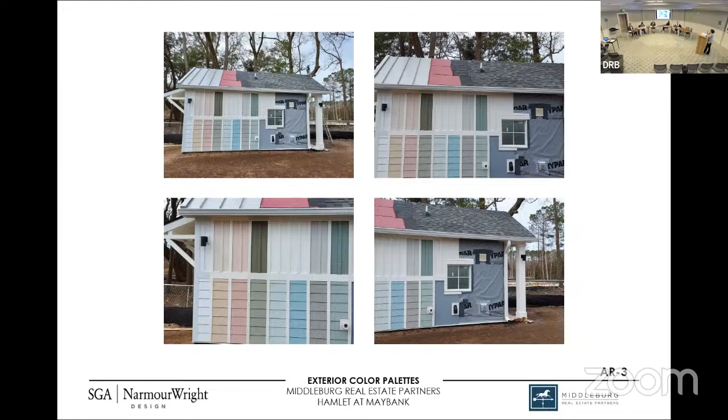Moving left to right in the image are the 9 colors for the dwelling units, inclusive of the main body color, portrayed on the lap siding, and the accent color, portrayed on the board and batten, and the trim color. Everything on the left-hand side of the panel is for you guys. We had the contractor intentionally leave exposed water vapor barrier flashing for us to use as quality control inside, so really we're asking you to look at the finished portion here, and the light fixture as well. If you flip, David, we'll see the ends of the panel—those are the amenity colors.

Flip again—this includes those color palettes applied to the various unit dwellings, so you can see how the main body and secondary colors are being utilized. You can flip again, and then options on the townhomes. I think that's it, I don't think there's another slide... oh, there—okay, renderings. Are there any questions from the board?

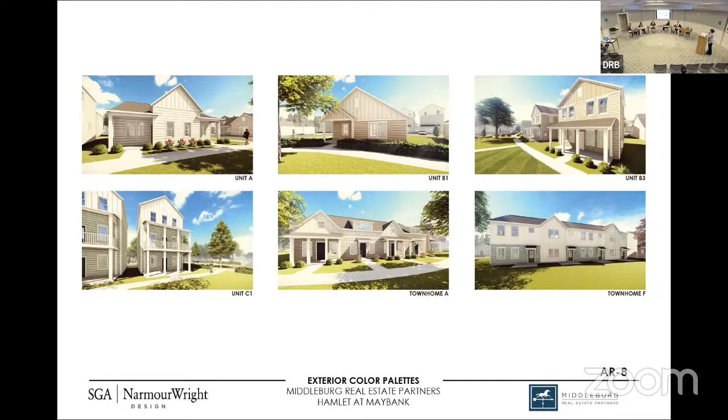Anyone from the public here to speak on this project?

Okay, staff comments? Thank you, Aaron. Staff inspected the mock-up panel on February 21st. We found the panel to be well constructed, with excellent craftsmanship. The materials are good, and in fact, the colors were great. We're recommending approval for the mock-up.

Applicant, want to clarify or respond to anything? Great. All right, you're welcome to sit down now.

We'll move into board discussion and a motion. My only comment was, as David and Lucas noted, the siding is close adjacent to the grade. Most cementitious manufacturers want you to have at least 6 inches. I'd be fine either with that or with a skirt board at the bottom. Either one's fine with me, but other than that, I think the mock-up's detailed well, and I actually like that you showed the breakaway that shows how the windows recessed a little bit. So I appreciated that.

All right, I'll make a motion. Motion for approval of the mock-up panel. Do we have a second? Second. All right, any further discussion?

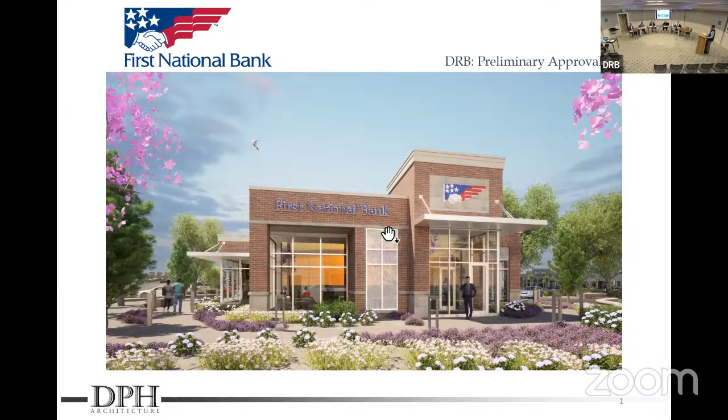So I did put some context slides in this, so as you can see where they're at, we are located in West Ashley. If we zoom in, we're at the intersection of Sam Rittenberg and Ashley River Road. And there's the site, the former Burger King site, currently it's vacant.

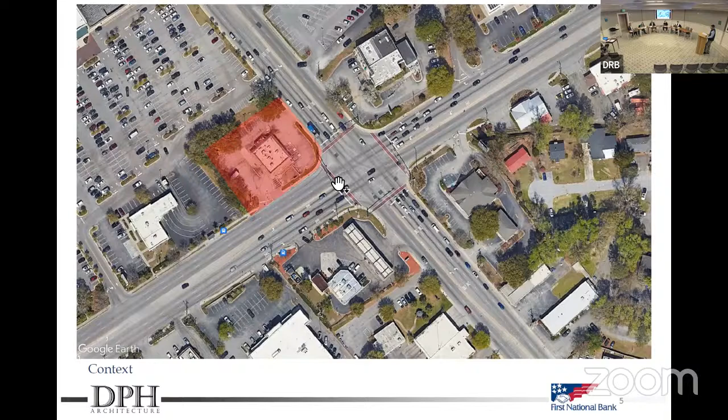All right, just let me know when you advance the slides. So this is the site as it currently exists, the abandoned Burger King with ingress and egress off of both Sam Rittenberg Boulevard and Ashley River Road. Some of the surrounding context, the Bank of America next door, the Customs Immigration Services across the road, the Tropical Smoothie just down the road, and then the Harris Teeter Plaza directly behind us.

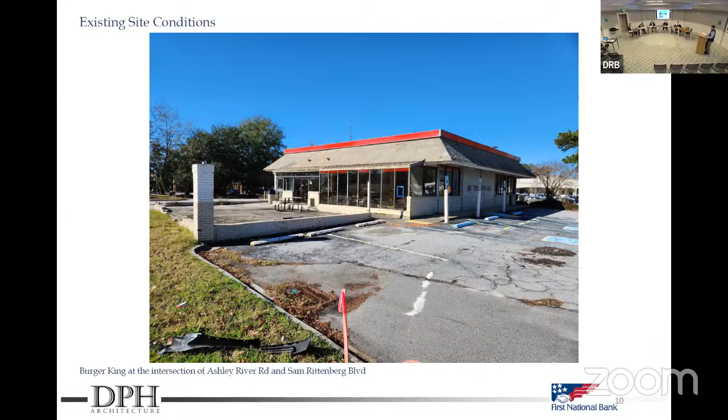There's the existing conditions of the site with the Burger King as it exists today. There's an overall context photo of what the bank branch will look like. So it's sitting facing the intersection there, providing a nice view for everybody by the site, with landscaping around.

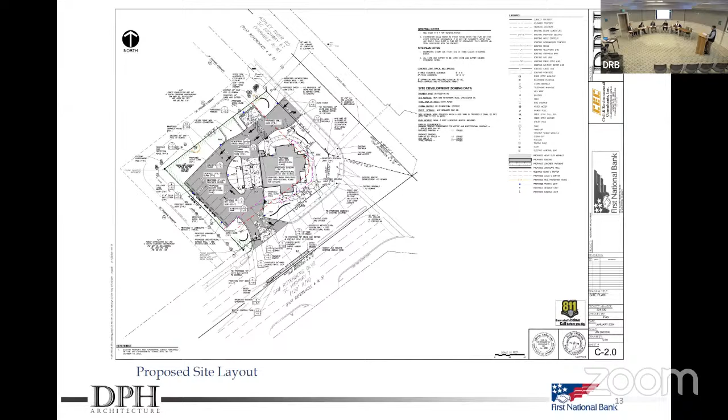Next slide. So this is the proposed site layout. As I mentioned, we pushed the building as far to the front as possible, and then we kept all the circulation in the back along with the parking. So we have a drive-through and parking space in back.

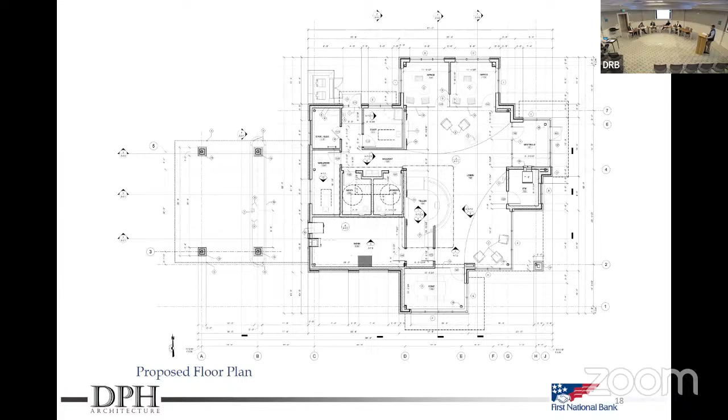Next. This is the proposed floor plan. The floor plan has not changed since our last submittal, but the only difference is that we added a couple windows on the back side of the building along the drive-through to add fenestration.

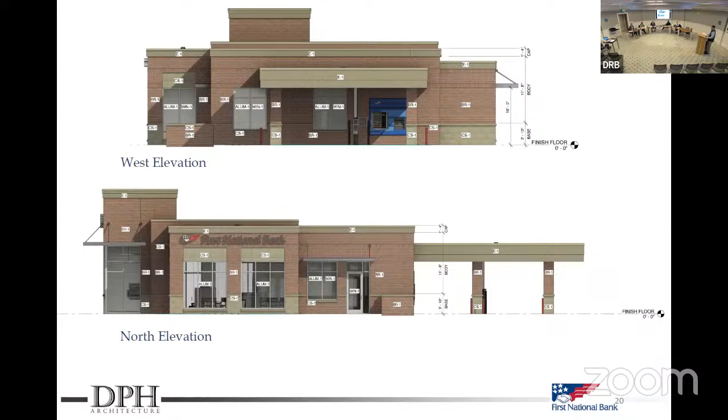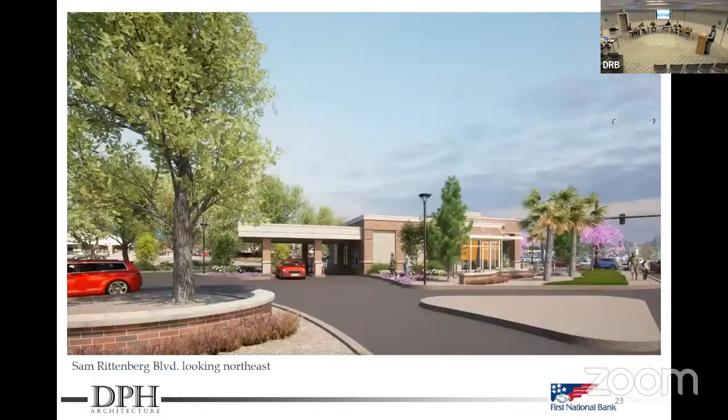You can just go through these, David. These were just the same thing that we saw. So this is the view that we have from the main intersection there, and then as David goes through, you can see it around the building. Just to clarify, I know it's a little light, but we showed mulching with river gravel—it looks a little similar to the concrete in the rendering there, but just to clarify that. And then sidewalks leading up to the front entrance. We have screen walls around the entrances there. Next slide.

This is the Ashley River Road side, just again showing elevations there. So these are the proposed materials that we're looking to use on the building.

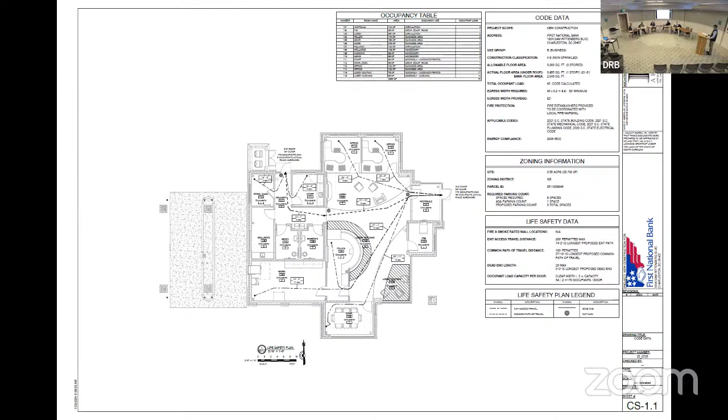All right. Are there any questions from the board? I have a couple questions.

Chair, the first question is the mechanical rooftop units. Are they completely concealed behind the parapet? Yes, they'd be completely concealed. Okay, so no screening - they are completely concealed in the depth of the parapet wall. Yes, that parapet's high enough if you want to. All right.

Any other questions from the board? Small detail, but are you draining the roof internally? Because there's no - I didn't see any downspouts. Yes, yeah, there will be overflow, just your standard cow tongues on certain locations around the building, but yes, the primary drainage is internal.

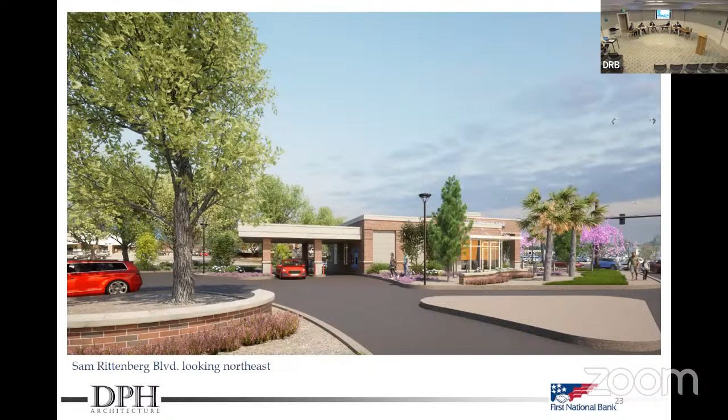Fine, it's 2 feet. Yeah, 2 feet.

With the staff's comment about continuing the water table - David, can you get one of those elevations? Yeah, it almost looks like it needs to stop where the brick is, I think. Is that what you guys are meaning, to stop where the brick is and keep it where the cast stone is?

You want, they're saying, potentially keep it cast stone. Some that are mislabeled. David, was your recommendation just to continue it all the way around? They're saying - I was questioning if you all thought that was a good idea, because you're saying study it. He's saying one study option. I see.

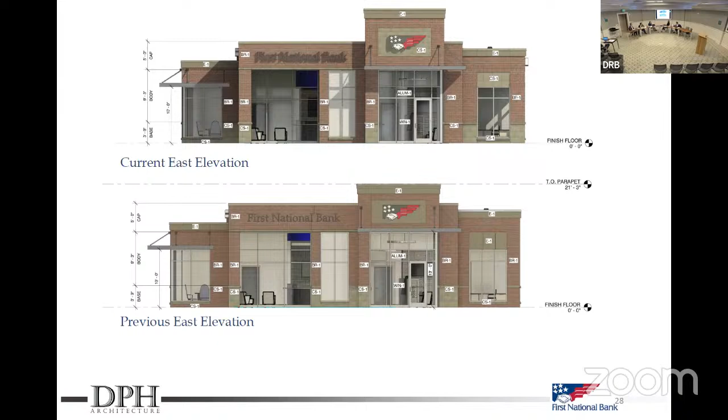Because there was one - which one was it that labeled it as that one right there? Yeah, here it is, one. Oh sorry, that one labeled discussed. I think I'm okay either way, but you guys just said to study it, right? Do you feel strongly about it one way or the other?

I think it's really nice tweaks from that, very nice, I agree. I think it's come a long way since the last presentation.

I agree with David's comments about the plant selection, that the red buds and the gardenia should be replaced, so that's concurrent. And then I also would like to request that the river gravel is replaced with an organic material indigenous to this region.

Let's motion it. All right, I'll make a motion for preliminary approval with staff comments 1, 2, 4, and 5, and board comment: river gravel replaced with organic material.

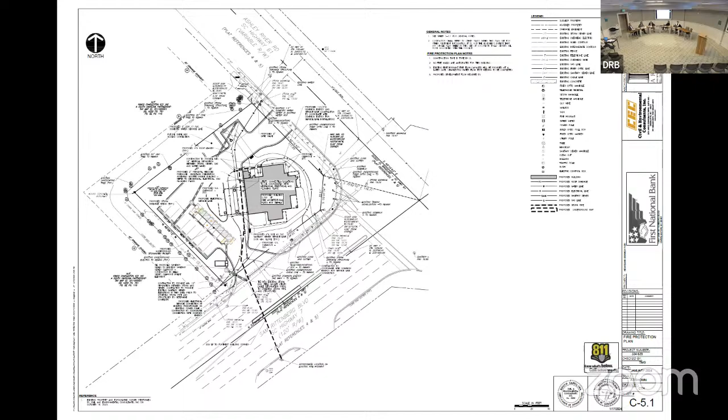So we have a motion for approval with staff comments 1, 2, 4, and 5, and with board comment to replace the river gravel with an organic material. Do we have a second? All right, I'll call roll. Ashley? Yes. I am also in favor, so the motion carries. Thank you.

Next item on our agenda is River Road at the intersection of the future Bernice Robinson Road, requesting preliminary approval for a new affordable housing community containing 90 units. We have seen this project before, so I didn't have any context slides, so you guys can jump right in.

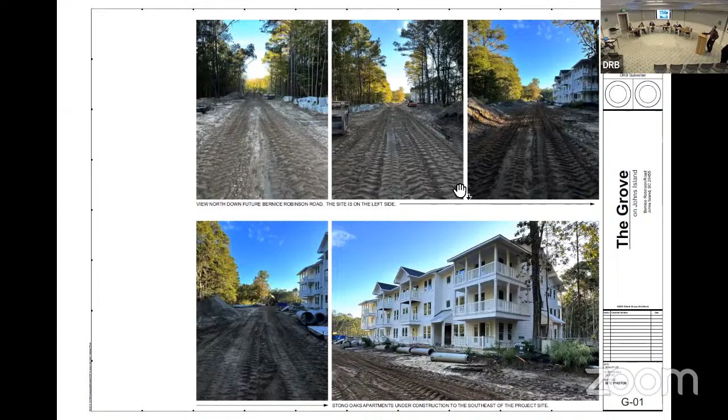Sorry. Yeah, and these are some of the site photos down the new road that's being built. And these are some images of the existing apartment complex under construction adjacent to our property.

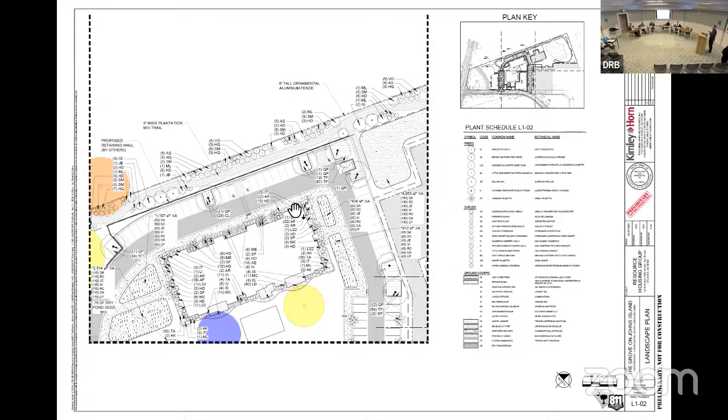We also gathered our condensing units around the building - instead of being scattered all around, we grouped them into little clusters at the rear of the building. Then there is - you want to advance - spots, see, yeah, you see some of those clusters.

And then there's a detail on L1-05 of a fence, kind of a living fence wall that will screen those units.

So this is what we're proposing for the fence along the property line. Like a wooden fence, solid fence, you can't see through it.

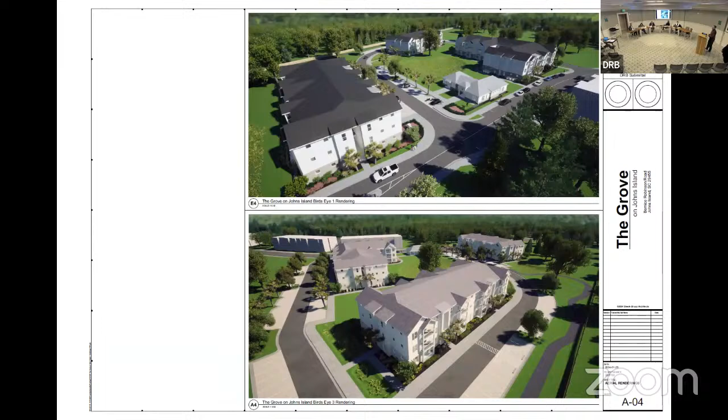Fence. And then we had some renderings of the buildings. This is one of the first buildings as you drive up. And then look at the corner of the L-shaped building. I see the clubhouse in the background, and this is a view of the community clubhouse.

So for the building floor plans, there were no real changes other than clustering the HVAC units. None of them are along the fronts of the building; they're all gathered to the rear or side, so they'll still be screened with a fence and landscaping.

Take the next couple, there's just floor plans, roof plans, and this is the community clubhouse. There's fitness, laundry, an activity room, a multi-purpose space, and then the leasing office in this building.

So the top elevations are from the previous version, and the bottom elevations are where we're currently at. Based on board and staff comments, we simplified the roof, eliminating the asymmetrical gables in favor of symmetrical gables over all of our balconies. We also simplified the siding, eliminating the two different siding sizes that were separated by vertical trim boards. Instead, we went to all 6-inch lap siding.

We also studied the breezeway entrances. In the previous version, they were flush with the building face. In this version, we projected them out to break up that elevation, as well as provide a little shed roof to help break the roof line up as well.

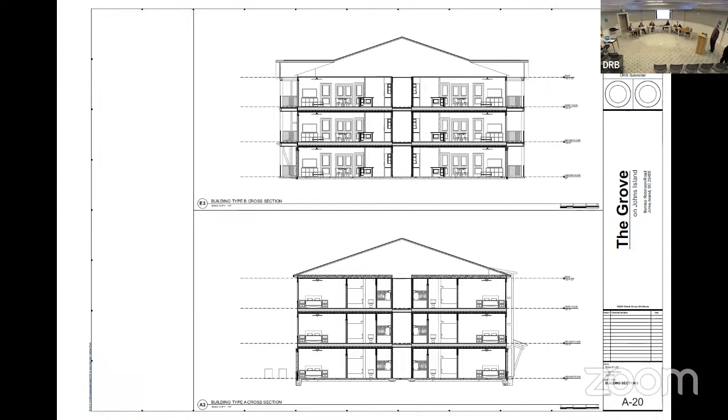And then some of the areas where we have the shed roofs and projections, we clad that in board and batten. Then the apartment buildings will have asphalt shingles and the clubhouse will have standing seam. I think we have a few wall sections, building sections in here. I'll kind of leave it at that.

Other questions from the board? I had one question, I know on sheet A13. Yeah, I was just curious, it looks like from the previous submittal to the current submittal, the roof, I guess...

This side, I was just curious what's going on there, and is there any way to just have it as a simple continuous ridge, or is... Yeah, it's for the shape of the building at that area. In this zone, you're transitioning, you're not as deep there, and so we were trying to find a way to keep that as simple as possible.

And what you're seeing is it looks a little more dramatic in elevation because you have that hard line, but it just hits back in that position a little bit to make the transition from this roof that's only covering half of the building width versus this side that's got more of it. We're also, on the other side of that elevation, we have a gable roof in that same plane.

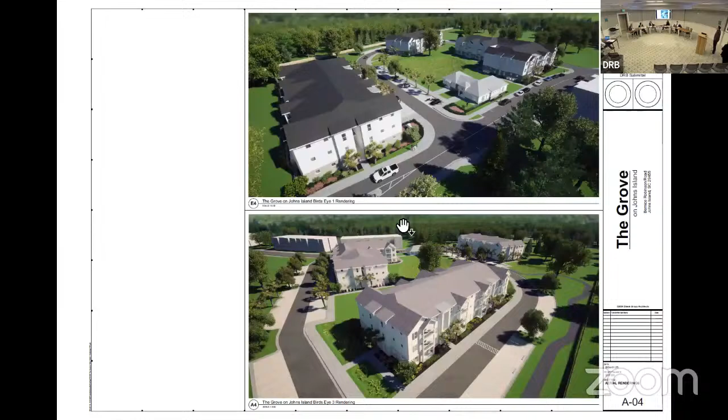At the entrances and main entry breezeway, there's a small thing - in the previous submittal you had some sort of screening covering the whole thing. Is there kind of a remnant of that on the ground floor? There's not, but in the enlarged elevation that calls out the materials, you're seeing the stair beyond, going up to that breezeway. Those are some brackets holding up the little shed roof, just to create a more pedestrian entry point.

But it's board and batten behind that - that tower piece, second panel, is a fiber cement panel. That's right, some trim boards and panel. Right behind that shed roof is a section of wall that the roof ties into. That's all fiber cement.

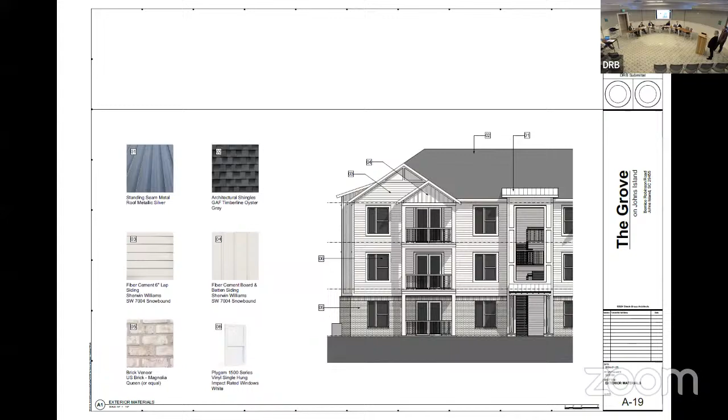One more question on clarifying the fence material - I know you mentioned it as being a solid wood fence, but I think it's called out as composite. The detail does call out composite. Yes, we are proposing composite fence that has the wood aesthetic. That's what I thought, but he had said solid wood, so I wanted to clarify. Okay, she said they are proposing composite with a wood aesthetic, for durability.

Any other board questions? Just out of curiosity, because I wasn't here for that conceptual review - the fun roof, was that the board comment? That was Dino's comment, the fun one. I like it, I wasn't here.

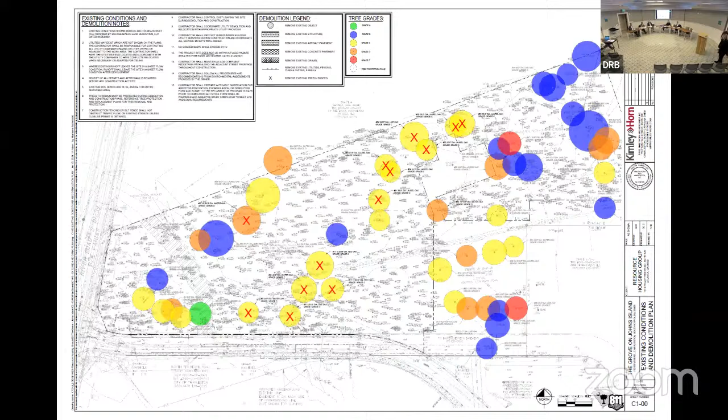So some of my questions are taken from the wetlands - are y'all working and had a study with the Corps of Engineers? You'll have to read all your questions before they can respond, we can't do a question and answer thing. The other one is, has the tree survey been conducted, if so by whom and when? And traffic is always a major issue in this area - I'm not sure we can even... we're not addressing that question right now. And if so, has a traffic study been done? That's just my question.

Could you state your name for the record please? Robin Mitchell. All right, thank you. We did receive another public comment from Robin Moore at 2347 Private Leffler Drive. The question was, does the building design allow for first responders to enter and exit quickly and safely? Those types of issues are addressed at TRC, so not really within our jurisdiction.

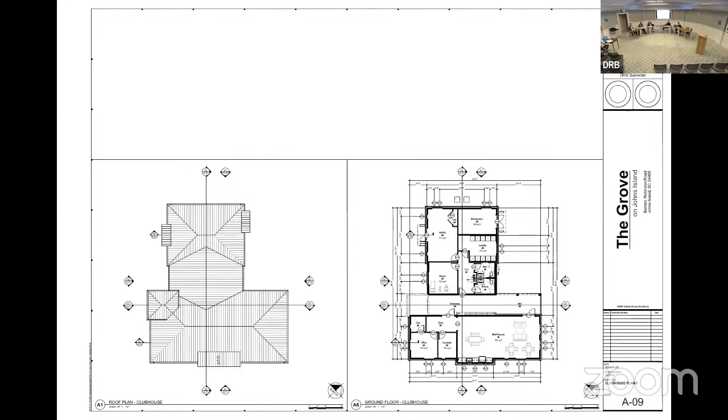Sorry, David. We will call roll. Lucas? Yes, in favor. I'm also in favor. Thank you. Thank you. Okay.

They're in the lobby. What's that? Yeah, they did tell me they're gonna walk out.

So I think all these might be one slide. At least we'll be close to that.

Okay, next item. Next item on our agenda is 3166 Maybank Highway Building E, requesting preliminary approval for Building E, one of two two-story buildings that are in phase 2 of this medical office and retail development. Do you have an introduction? Thank you, Erin. No introduction, we've done this project before, so we'll step right up.

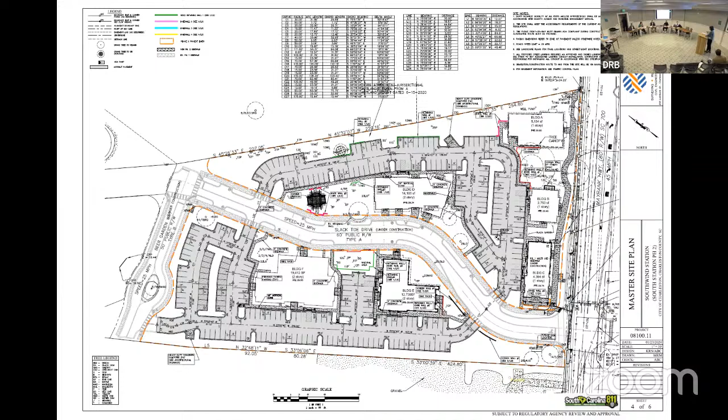So the buildings were placed up against Slack Tide Drive, which is currently constructed and very close to being dedicated over to the city, as well as Beer Garden Way. And so we placed the buildings up along Slack Tide Drive.

And also then we worked around the grand trees. There's a couple of clusters of trees, a really nice magnolia, some other smaller trees, and then another nice cluster of live oaks. So we worked around the building, notching out the corners of the buildings in order to get them up to the street and have that presence up to the street as well, saving the grand trees.

As well, we have along the entrance here some screen walls, because of the awkward connection of the drive where we had to put the entrance to get to the back of the site. With the entrance there, you can kind of see the parking, so screen walls have been placed there to provide a little bit of architectural element up along the street and at the same time screen some of the parking.

As far as the landscaping goes, it follows mostly the same native plant material that we proposed in phase 1 — besides the deadly saw palmetto that Andy was so against last time. That was removed, but for the most part it's native plant material, enhancing the areas where we saved trees and then working around the buildings.

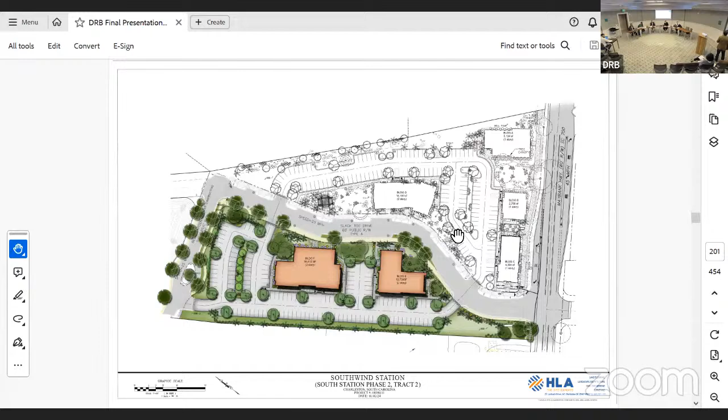So just a quick refresher for the board — obviously we've got 6 shell buildings in the whole master plan. A, B, C, and D were approved preliminarily back in October, and then in June we presented the whole master plan with initial concepts for each building, along with building E and F that was approved. These are the single-story buildings along Maybank, and then D is the 2-story building.

So everything in blue was the previous submittal, and tonight we're here for presentation of building E and F, which is shown in orange here.

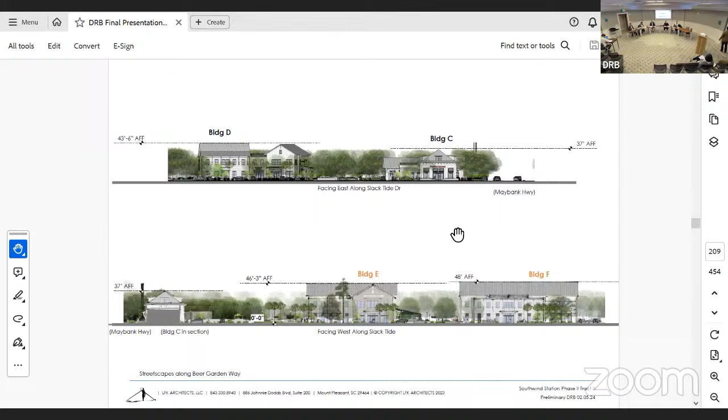This gives you a sense of scale along Slack Tide Drive. Again, we've got Maybank to the left here, single story, then stepping up to D and E, and also F. Previously building D was approved, which was also 2 stories, showing you that graduation. Building E sits about 215 feet from Maybank Highway, so even at a larger scale, we've got some distance between us and the intersections.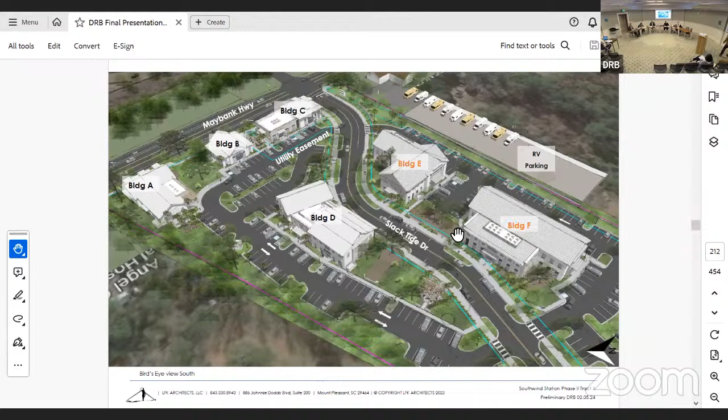Enlargement of a single story along Maybank. This is a good slide to showcase that building E does have frontage, visible from Maybank, and building F, which we'll get to in the next presentation, is right across from the common Central Park area with the pergola, and also faces towards Slack Tide. Again, this is the RV as our neighbor to the west.

Let's see, next slide please. So just to give you a sense of what the architecture might feel like once this is built out, kind of touring the medical village. This is the language along Maybank.

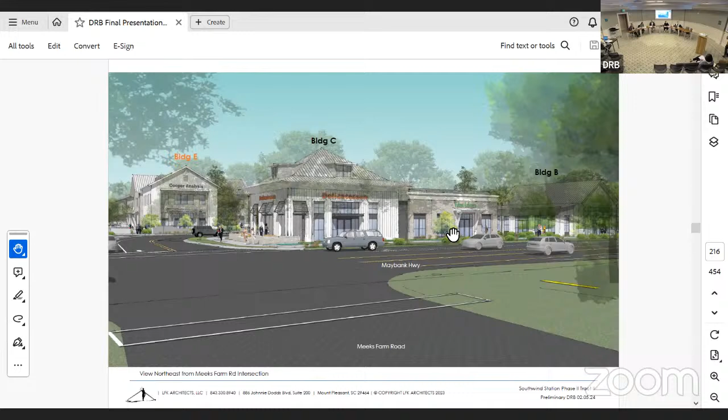This is at the intersection of Meeks Farm Road, and this is building E, which we'll be presenting tonight. But just again, to give you a sense of the palette we had before: board and batten, brick, some really simple roof forms, and all the language is tied together by the same exterior materials palette.

And then as you turn into Slack Tide Drive off of Maybank, you start to see the scale of the buildings grow, and this is building E right there. So that concludes the overview of the master plan, just a refresher of what we presented before.

David, I think slide 220, we can start with that. So I do want to point out that nothing has substantially changed with building E. Our square footage is almost exactly the same, our height and scale of mass is the same. We have added a lot of additional detailing and some brick and fenestration, but the massing is the same. This might be a good slide to jump ahead and talk about these retaining walls.

So we've had these different knee walls and retaining walls throughout the whole master plan. In this case, in front of E, these retaining walls are acting as a screening for the parking. This is a tabby wall that graduates and has a brick cap to it. That doesn't show up in a lot of other drawings, so I want to point it out now.

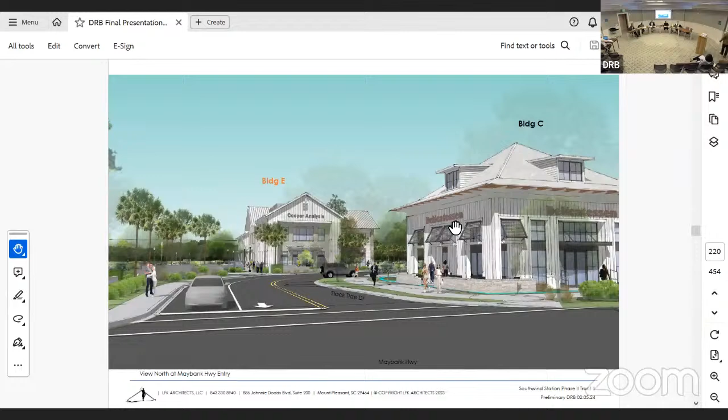Next slide, please. This is just a view going north along Slack Tide. So we have our main entry plaza that will be facing Maybank. This is building C, which was previously approved. Next slide. And then this is a good view that shows building E and F in sequence.

And we have this kind of natural landscape area that we're keeping, and we've got these knee walls that emerge and provide some areas for pedestrians to have seating along the sidewalk. Next slide, please.

Okay, and if we can jump ahead to the plan view, which is 221. Yep, here we go. So again, this is a shell building, two stories. The intent is a flexible design that can be set up for two to four tenants.

So this building has really been shaped by Slack Tide Drive and also by trying to work around some of the existing natural landscape and low areas and this magnolia tree, but it's really designed to acknowledge Maybank and also to acknowledge Slack Tide Drive, which you see in this image right here.

So we've got four entries at grade. The primary entry to the second floor, the elevator lobby, occurs on the parking lot side, and we have a small plaza here on the other side of the building that acknowledges Slack Tide Drive.

Next slide. Second floor is simply a shell building. Next slide. Roof plan, we've got a primary gable form and then a secondary gable form, and then all of our mechanicals are tucked into a well on the west roof line.

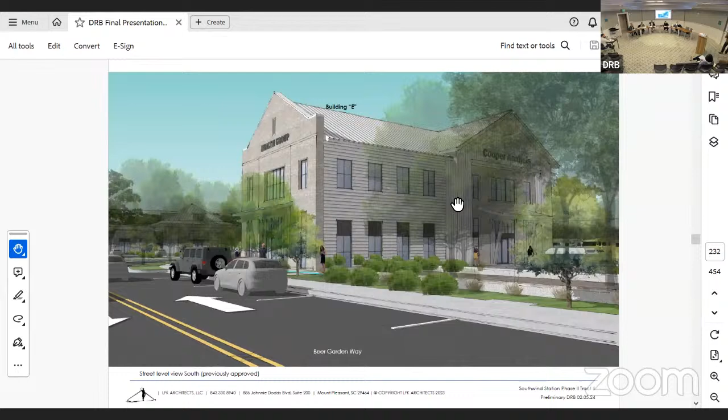And I believe Mr. Dino's asked us to restudy this brick parapet feature here. So that's the main thing we focused on since the last presentation. So if we go to the next slide, this shows you the new articulation of the brick.

Really a simplified roof line that matches this crossing gable that extends and shows itself on the other side of the building. So we've got this in elevation too, which might be easier to see. But that was the main thing that has evolved since the last presentation.

Next slide. Again, this was the previous version. You're going to see a little bit of difference in some of the fenestration here. We've added some detail. If you go to the next slide, please.

So we've got a little bit of corbelling of these brick accent panels that step back. We've simplified some of the fenestration up here - previously it was a 4-unit window, now it's 3. We've added some gutter downspouts and done some stuff to make it real. We've worked with the structural engineer to better understand the floor plate, and we feel like all of our heights and window heads are set at this point.

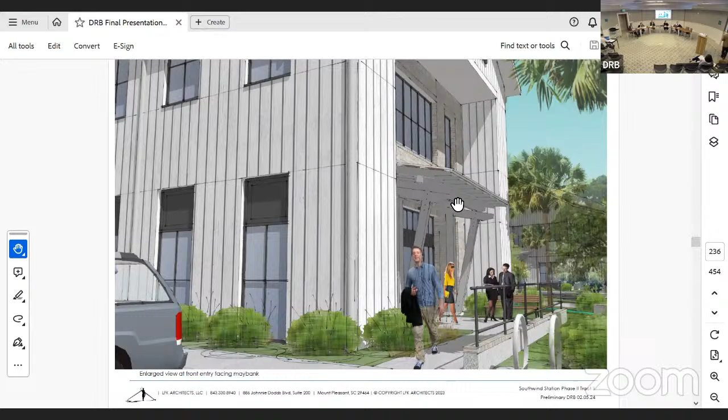And so the material palette, again, is consistent with what we previously proposed. If there's any questions, we'd be happy to answer them.

Thank you. Are there questions from the board? Go for it.

The brick on that went from the parapet to basically under the gable roof. What's the return back? It looks kind of flush in the renderings, but the plan shows it's got some relief when it turns back. What is that depth that it turns back to the siding? It turns back about 2'4", trying to keep it within a masonry increment.

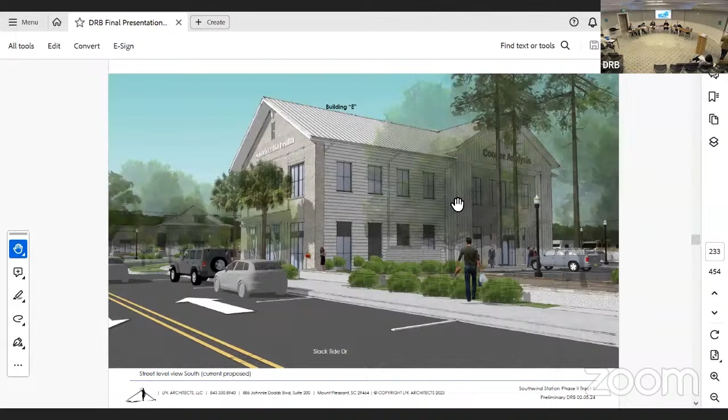There was a slide earlier that showed this building in sequence with building F, and you see that same kind of brick bookend occur on building F that fronts towards building E. To answer your question, it's roughly 2 feet 4 inches long. 2 feet is the depth, but what's the return back to the building itself, the siding?

It almost looks flush in the rendering - that's what I'm asking. I think our plan on 221 shows it's roughly 12 inches, and I don't have it dimensioned, so I'm eyeballing that - roughly a foot.

I have a couple questions, and I think you might have just answered one. Everything's really well put together, but you have this really clear diagram of these two intersecting gables, and it's so close to being one brick and one siding, and they come together. You even have that entrance of the siding gable carved away and the brick of the other gable being revealed. So I figured there must be a reason you didn't just continue the brick along the sides of that quote unquote brick gable.

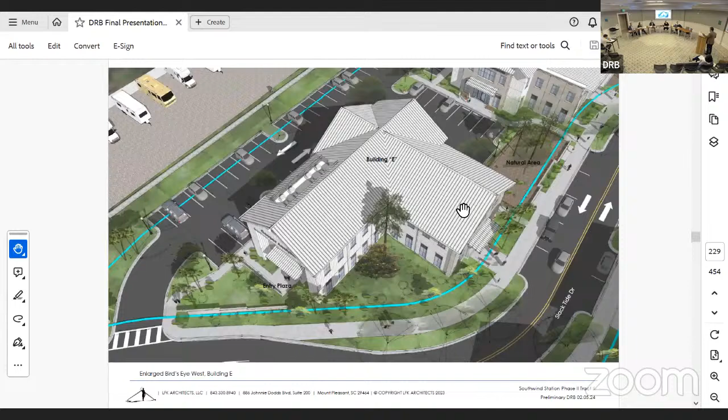Yeah, so it has some relationship to the previous building D that we had approved as well. There's a slide that shows a bird's eye in 229 - anyways, it was sort of in keeping with what we were doing on building F. So right here you start to see these forms emerging throughout the whole master plan. Between this form and that form, we're actually using a different siding as well to further differentiate those two.

And then the other question is the gables are different widths, right? Slightly, yeah, slightly. I know this can get fussy, but is there any way to get the eaves and ridges lined up, like having a heel on the truss or a different slope on one side? Because it's just close enough where...

You're exactly right, we sort of arm wrestled over that, studied that. I think our elevation shows some good depictions of it too - almost there. You could even put a heel - is it a truss roof? It is. You can see previously this was the previous one - we actually had one primary spine or gable, and each side had a different gable. So to provide some consistency, we let this run all the way through the building. You can see it's slightly longer, but we could elevate it and try to align those eaves.

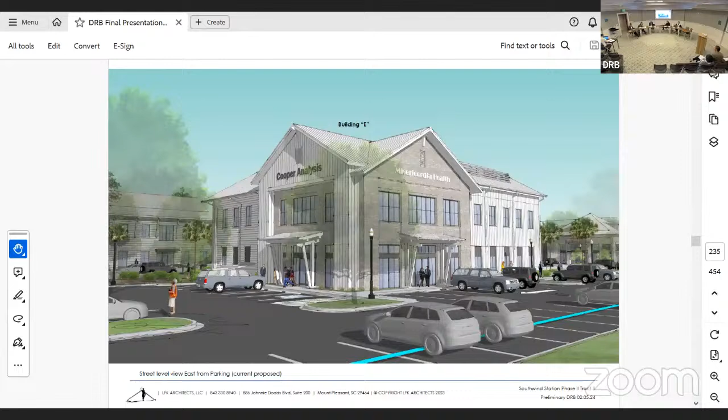Staff recommends taller screening along the fence line in addition to the palmettos. Consider more variety and random placement of the plants rather than consistent groupings of two species. Consider more ornamental trees along this fence line that have a wider crown to screen at higher levels. Consider eliminating the long grass specified in this area and letting this strip go naturalized.

We ask that the applicants provide more photos of this lot line to show the fence as existing, and show the fence on the site and landscape plan. Staff also questions the spacing of about 4 feet for the specified camellias in Florida that can get two times that width. Staff suggests spacing the plants more appropriately - the same amount of plants could be spread out to cover more of this area. Consider native plants that don't require irrigation.

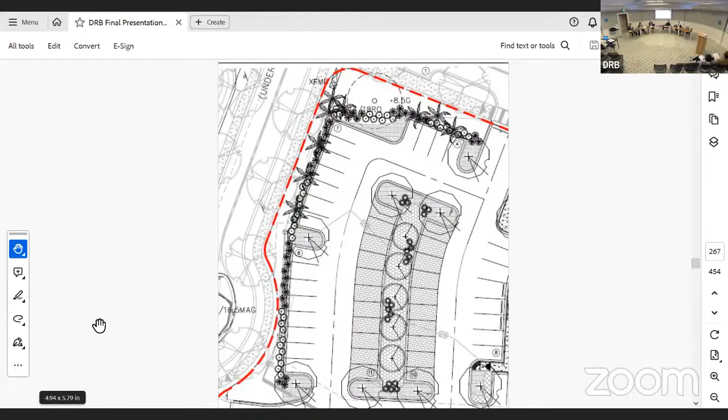Staff comment number one: there are some areas on the landscape plan - here's a blow up - in the northeast corner of this phase boundary that did not get defined as to what it will be specified as. I believe this might be intended for long grass, but it's not called out. I believe maybe the hatching or stippling was turned off. But we do recommend preliminary approval with the conditions noted and final review by staff.

Thank you. Would the applicant like to respond or clarify any staff comments? Yes, as far as the buffer along this property, there's a drainage easement in the existing conditions through the site - a large ditch that picked up from SCDOT drainage that backs down to the wetlands. That drainage is being rerouted, so this will be a city drainage easement running all the way along through here, so there isn't a lot of room to put larger trees. We probably could do something a little taller with some landscaping and evergreens, but there really isn't room for a nice thick buffer. Within the PUD, there is no buffer required up against this adjacent commercial use.

Something we can look at and see what we can do, but we won't be able to plant that whole kind of area. You are specifying quite a bit of plants here. I was wondering if you could spread those out. That's what we can't choose, more native plants. They're lined up like they are because of the city drainage easement. They don't want us to put any planting on top of the actual storm water pipe.

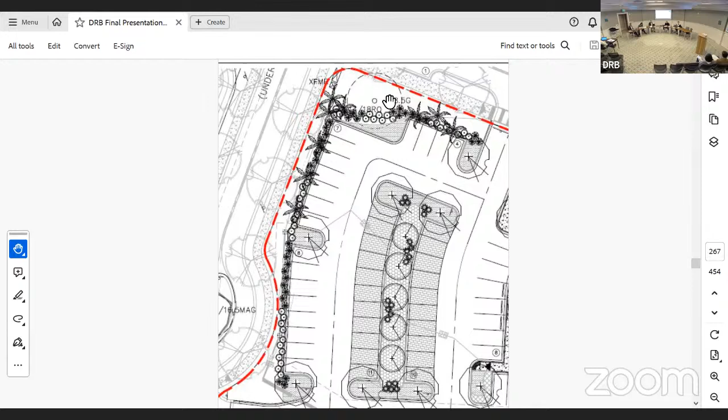All right, moving forward, discussion.

I think it's an elegant building. I think it's made improvements from the conceptual. I didn't think I would mind it until Lucas mentioned it, but I do think a little restudy of the roof line there could be helpful. But other than that, I'm good.

I'll just say, see if you can align the ridge and the eaves, and try continuing the brick, so it's one brick volume, one siding volume.

As far as staff comments go, I agree with the first part of David's comment, that if we could see the delineation we can understand where we can't plant, but within that planting area, you could probably vary the height of the screening a little more to break up that view into the RV. So I agree with that, though I would like to strike the second paragraph.

Mostly because of that last sentence, native plants still need irrigation, so I don't want to spread that myth any further. Cancel the whole paragraph, and I'm not opposed to planting them densely.

And then one other thing for consistency, I think we should request a replacement of redbuds, since we did on the previous two projects, so we're consistent with all of our projects.

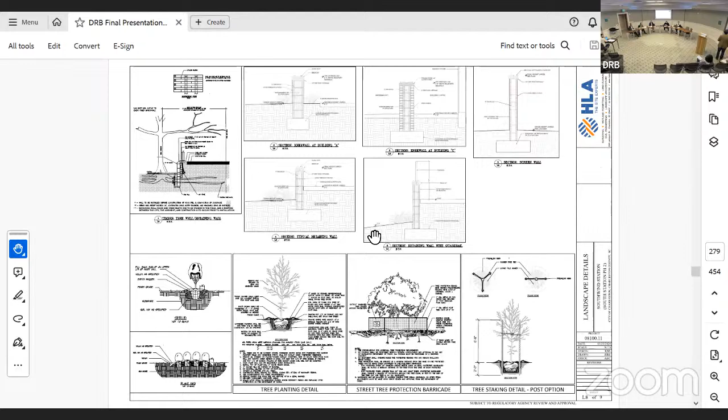Okay, there we go. So last building is building F. It's the largest building, 19,412 square feet. And again, this is acknowledging Beer Garden Way and Slack Tide Drive.

This building is also shaped by some of the existing site features. We have a 22-inch live oak we're saving here in this natural area, and then it's surrounded by parking. The majority of our parking for Tract 2 happens on this side of the building, on that side of the site. If we could jump to the plans, which should be one or two slides.

There we go. So similar to the other buildings, this is a shell. We see this being set up for maybe anywhere from one to two up to four or five tenants. We have the one primary vertical circulation for the elevator lobby

adjacent to the rear parking. We do have a little bit of a longer porch element on this side as it's serving so much of the parking. This building is just a larger scale. And then on Slack Tide Drive up here, that's the little small plaza entry that we have as well.

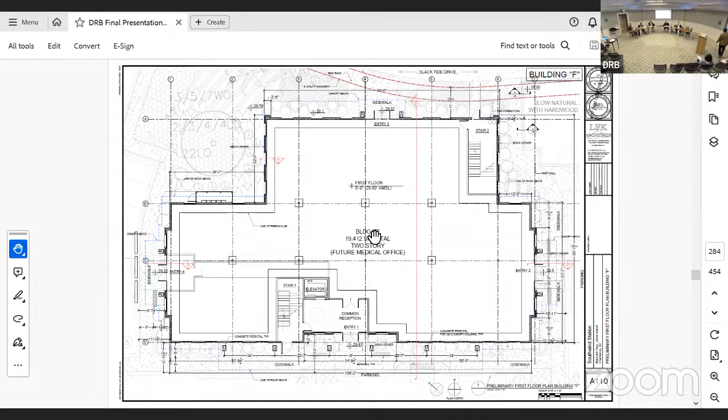Next slide. And just second level is a shell. So rooftop might be worth talking about.

So we have a primary gable, and then we step down to the shed roof line, and then we have this sort of buttressing kind of parapet effect on each side with these brick masonry elements. And then we conceal the mechanical with a flat wall on the roof line.

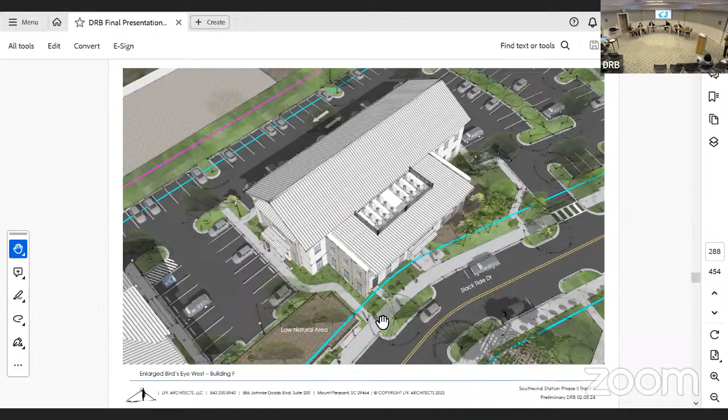So just a quick bird's eye view of building F. And again, you can see these natural areas here, and then this is where we have that 22-inch live oak. This is our plaza fronting Slack Tide Drive, and then the RV sort of in the back.

Next slide, please. This is a good perspective to see that this building actually happens right across from the central park-like area as well.

Just a rear parking lot entry here. This building has some massing elements with brick bays. It very much relates to what was going on with building D, sort of across Slack Tide Drive.

So a view along Slack Tide, and that's the natural area right there between the E and F. Next slide. Oh, I'm sorry, let's back up one. So this was the previous right here.

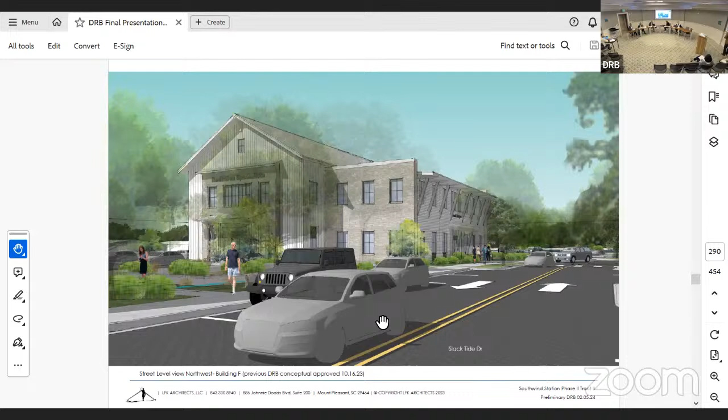And you can see since that time, we've had some further articulation of the windows and the brick detailing. Next slide, please. So we lined up these window heads, added the accent panels here at this spandrel level.

We've got some graduation and some corbelling up here that sort of matches what we're doing on some of the front buildings along Midbank.

I think previously one of the comments was we had a window up there and it was a question of is there actually a third floor, and there's not. So we simplified that just to have this sort of punctuation, this little louvered element there. And then this will be the facade that fronts towards Beer Garden Way.

Next slide, please. Okay, we can jump to the next one. Oh, so that was previously proposed. We've actually increased the overhang of our rear entry here at this porch-like element on the back. We've added some downspouts, and again, sort of further coordinated our actual floor plates.

We've kind of delineated where we have our through-wall Z flashing for all of these less than 12-foot segments of our vertical board battens, fiber cement.

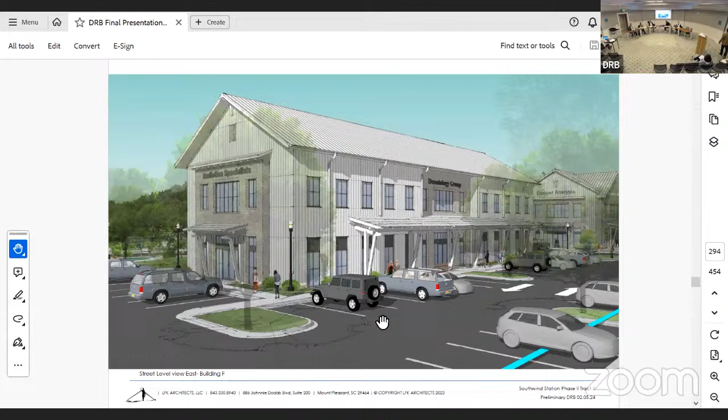Next slide, please. And then finally, we just got the typical entry at our timber canopy with the cedar soffit. This is going into the second floor elevator lobby.

I think the final slide would be the materials palette, which may be one or two further. Yeah, right there. So if there's any questions about materials, again, they're very consistent with the previous buildings.

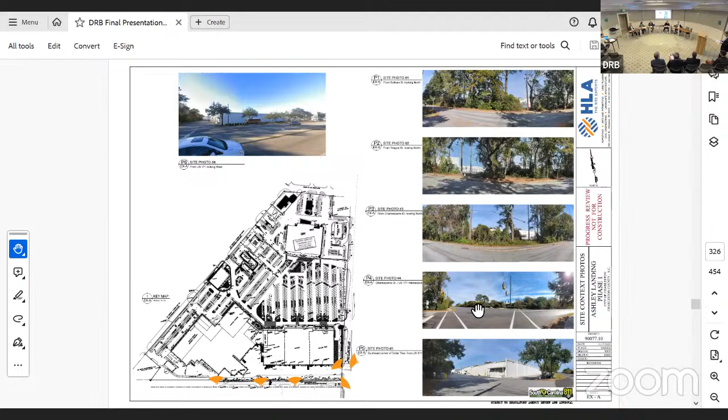Just get through the photos, and Nick Allport's going to join me to walk us through the landscaping. This is the demolition plan, showing the site demolition plan. This was submitted when we were here in December for 2 applications: one was a separate demolition application covering the existing old department store building as well as the theater, most recently a church, in the back of the center. And then this is the overall site plan.

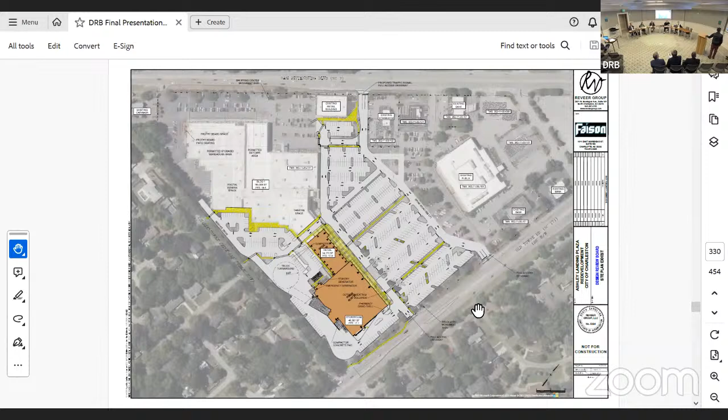Showing the site improvements, which are part of the TRC submission as well. This is where we began to address a number of the comments. Nick, if you want to start jumping into the landscape—actually, before we jump off, it shows up better on the next one. You'll see some differences from our last one, and I'll sort of hit the pedestrian connectivities.

One of the comments we received was, in addition to the pedestrian connection we have up at the west side of this plan, north, which brings people—it's a current cut-through to the Charleston Drive neighborhood—we are able to bring people along a sidewalk area and into the center, crosswalks, and then the connection points over to the north side of the center. One of the comments was we found a place to do a second crossing, incorporated an island where we had some painted area before, and we're able to bring people again through this pedestrian connectivity over to the sidewalk area.

We also found a place to relocate the dumpsters that were previously here in the last plan and moved them to a more hidden area on the site, tucked in behind the Publix facade on the rear, which also gave us a second opportunity to screen the generator that's here for the Publix. So it really came out to be a much better situation in the back. I think one of the comments was we spent a lot of time on the architecture—spend more time on the facade, on the environment, and how people were getting through the site, especially from this neighborhood, which continues to be able to access the site.

I'll let Nick jump into the landscaping as we get into questions. So the overall intent of this landscape plan was to bring an emphasis to the pedestrian connections as well as pedestrian areas, and to soften the site into the areas that we were able to.

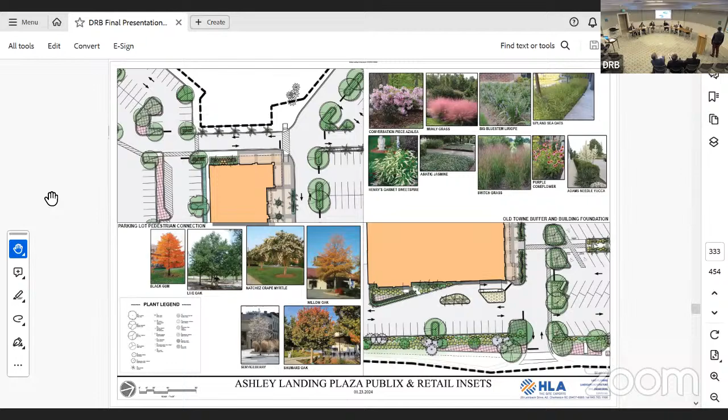We were also able to soften up these two islands up front, and then these are the technical landscape drawings here.

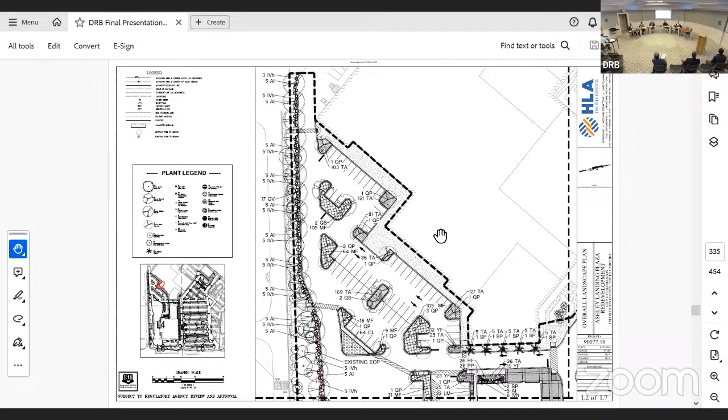You want to talk about the enlargements at all? I don't think so. This does allow you to see some of the depth of the sidewalk area and how we accommodate pedestrian connectivity to the front, from the rear to the center. But I think Bill Fisher will get into the building design. We do have 4 minutes left—is that enough time or do you want to extend?

Okay, David, can you go to the next slide? My intent in 4 minutes is to go through your comments and hit the renderings, and then I've got some before and after comparative elevations.

One of the comments before, we used what we'd call a Charleston fixture, but we've changed our light fixtures to a more contemporary fixture that will go with more of the architecture. We've embellished the side, which I call the north-south connectivity, and added some more clerestory lighting.

There was a question, but I think we've addressed it—this is all true clerestory lighting on the retail. We've also emphasized the tower at the front of Publix.

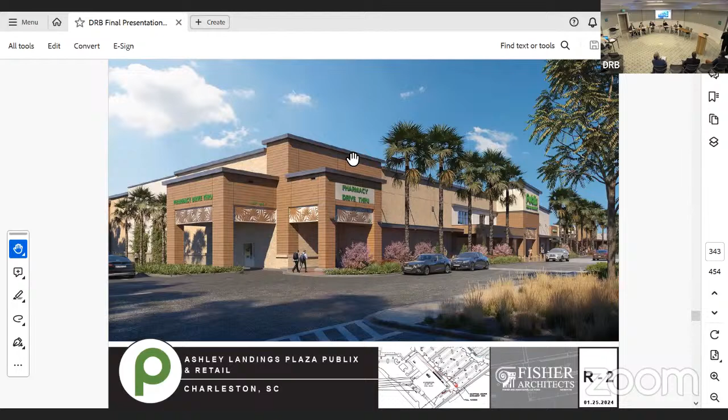So if you go to the next slide, this is from the southeast corner of the Publix. Again, increasing the landscaping—these were striped asphalt originally, but now this is lower landscaping, and these three palms are an additional island.

We'll get to an elevation, but this was spandrel glass, false glass. We've embellished that more and articulated the end cap a little bit more. Next slide please—this is the back.

This would be the southwest corner. Before we saw this view, there was a concern about this element—we had this element at 3 feet, and we've increased it to 10 feet off the wall.

What we've done is put true vision glass in, and that's a display window that's lit at night. Where we had the spandrel glass before, we've got laser cut aluminum embellishment that goes up the side.

There was also a concern at the time that we were using painted stucco and brick. This facade, aside from the wood-look areas, is all brick—same with the front elevation. There was a concern that the front elevation had some areas below that were painted stucco; the comment was to replace those with brick, but instead we did the whole facade as brick.

Next—this is very similar to what was before, except the lighting has changed. We've kept the festive lighting in but changed the poles out. It also gives me another opportunity to talk about the clerestory lighting.

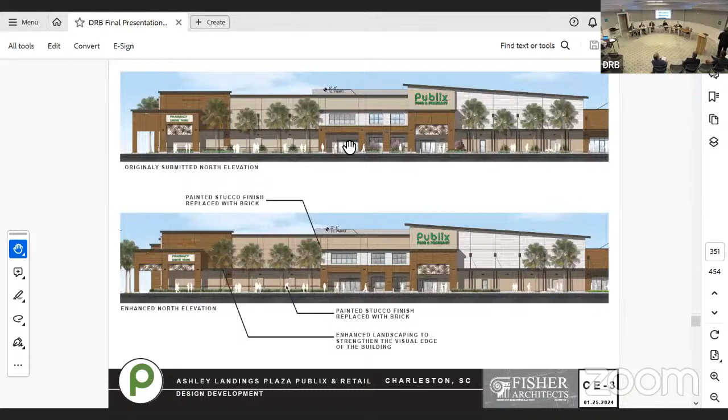Next slide please. The side elevation, which was the most conversation. This is a drive-through pharmacy. This was false glass, and as we talked, I have a big phobia about false glass, but this was spandrel glass, basically an element in the back to help balance out the elevation.

What we've done is taken the spandrel out, and this is laser cut aluminum ornamental inserts on brick. This area pops forward by 7 feet, and these are display windows. There was a concern—this door was a painted metal door, now it's a curtain wall storefront. That was the big concern before, and I expect conversation on this. Next elevation, please.

This is the side we didn't overly talk about, but we really embellished it quite a bit because of that north-south drive. This is the side of the retail shops on the north-south drive, and this is the Publix. We've added quite a bit of ornamental landscaping here, but also articulated the elevations more and added the clerestory. In addition, when we relocated the dumpsters, which aren't really shown here, we put them in this area.

We used that—they're actually in front of this drawing. There's a generator here, which has a screen wall. We've added additional heavy landscaping in the back. So that kind of gives you an idea of what we've done.

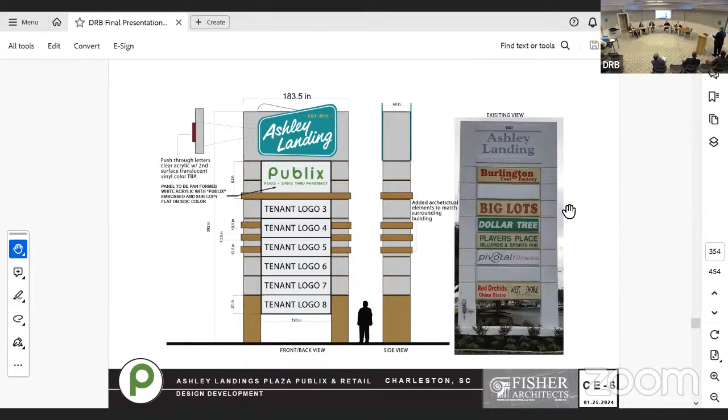4 minutes—went over a little bit, but I've got okay, pictures, I've got other things. So if we go to, it was a big question, go to page 32 if you would. Can we keep going? I don't think I have the same page. So this is the one.

So there was a discussion about trying to make the second floor a walkout area. We have a cafe up top, and it's programmed to look down over the store but also to bring light in from the back side. These windows are to bring light into the cafe. The conversation was to make this an outdoor patio, but it's not programmed as such—they don't line up to one another.

Publix's concern is that the north elevation would be a cold, wet elevation, and we've got patios down below for that purpose, so we'd respectfully prefer not to do it. It's just not a maintenance thing they want to take on, plus it's not programmed that way—their store is set up to look down over the cafe and over the store, so it's kind of not the concept they're doing.

So that's the one thing we didn't properly address, or we just chose not to do. I have slides of light fixtures and things like that if you choose, and that's my 4 minutes.

Thank you. Now, are there more questions? I have a couple. On the east elevation, where you've added the display windows—how does Publix typically program that space? Without a doubt, there'd be banners in it, hung from the ceilings.

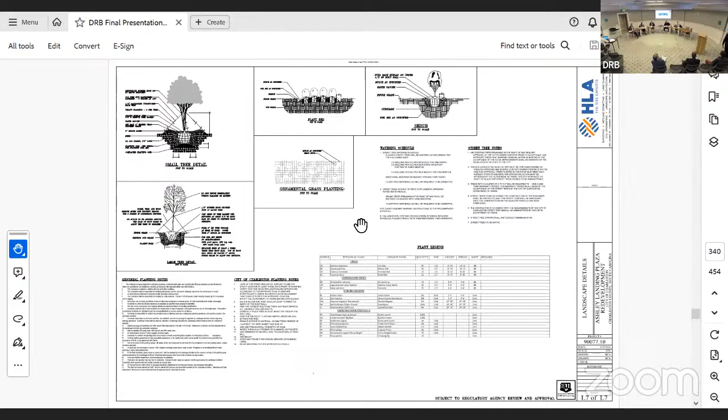So if you could go backwards to where there's some wall sections—oh, I'm sorry, the other backwards, deeper into the stack, the first set of sections, probably. Keep going, please. We're looking for the east wall. Two more.

One more thing. This is a section through here, and this is that space, and there would always be banners in it, seasonal banners. It wouldn't be props like crates of fruit or anything like that, but banners that would all be lit at night, so it'd be displayed.

Okay, thank you. And then we also talked about the fence on the rear side of the property. I'm having a hard time recalling, did we decide we weren't doing anything with that because it was going to go away with rerouting the intersection? Or is that addressed in landscaping? Right, it's going to end up having to be replaced, the fences on our property.

Some of the fence will get rerouted with the road widening, or road realignment, that the county will do in Charleston eventually. Sections of that fence will be completely removed, and some of it has to be replaced. Okay, thank you.

Is there anyone here from the public to speak on this project?

Okay, city staff recommendations. Some staff observations first: staff supports the revisions to the site and building made since the last meeting. The project has progressed nicely. We support the improvements to the east and west elevations with the added glazing and panels with ornamental aluminum cutouts. The change from stucco to brick in the areas indicated is also an improvement. Staff is supportive of the hardscape in front of the buildings, as applicants are proposing a nice streetscape with decorative pavers, tree grates, and planters.

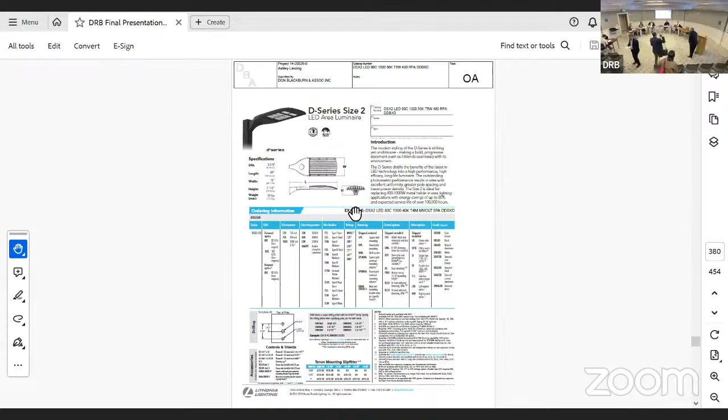Okay, next item on the agenda is 1656 Savannah Highway, requesting conceptual approval for a new addition and renovation to an existing Chick-fil-A restaurant.

I do have a few context slides. If I could direct your attention to the screen.

Do you need this? I have photos of it, but do you need the actual sample? You mind? No, I'll look at it. Thank you. We want to pass this thing around. We'll touch it and change our mind. Actually, no, we don't want. The black one's loose, it falls off.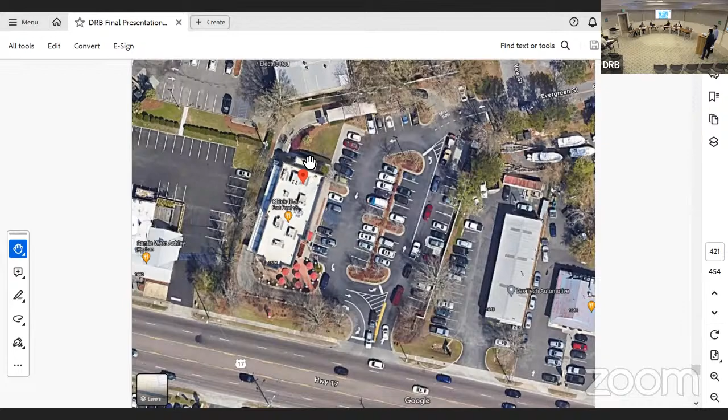Yes, so we would be demoing it, and the view into the site. They don't need any approval for the demo since it's not 50 years old. View into the site. And with that, I'll turn it over to the applicant.

Thank you, we all need more than 10 minutes. Are you good? Oh, we're good now.

Good afternoon, my name is Kevin Gomez, I'm from Interplan, civil designer, and this is Travis Reynolds, architect project manager, Interplan. Let's go to the next slide, please.

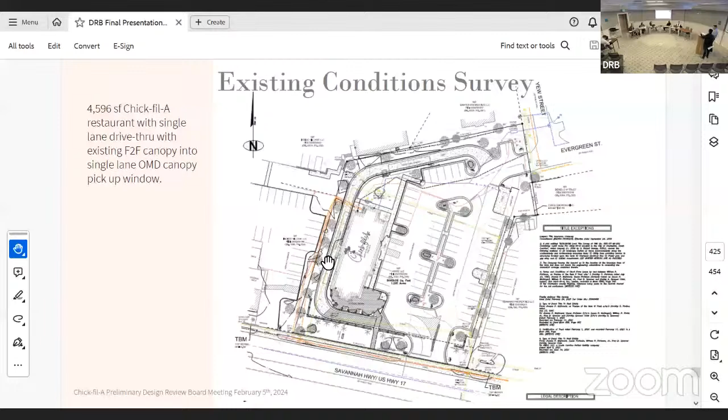So this is the survey. We can see the existing condition of the Chick-fil-A. It's very typical Chick-fil-A, it has a drive-through. On the top you can see a canopy, that's what we call the face-to-face canopy, where the staff member picks up the order from the customer. On the bottom you will see another canopy, we call it the OMD canopy, that's where the staff member delivers the food to the customer. Then the customer can leave the site or they can park so they can eat.

Next slide, please. So this is the proposed site. It's very straightforward, what we're doing is increasing the capacity of the drive-through. Now we have a triple lane on the entrance, and we are proposing a new face-to-face canopy because now it's bigger. This all transitions to a dual lane down to the building, where we're proposing another canopy, a little bit bigger, with the OMD. Also, because we have a bigger drive-through entrance, we have to rotate the dumpster a little bit so the trash truck does not block the entrance of the site.

And as you can see, we also added the building addition on the rear, you can see it's a little bit bigger. That's pretty much it for the site, so we can go to the building.

Next slide, please. So of course, this is our previous building footprint there with the small service yard and mechanical room and electrical. So if you want to flip to the next slide.

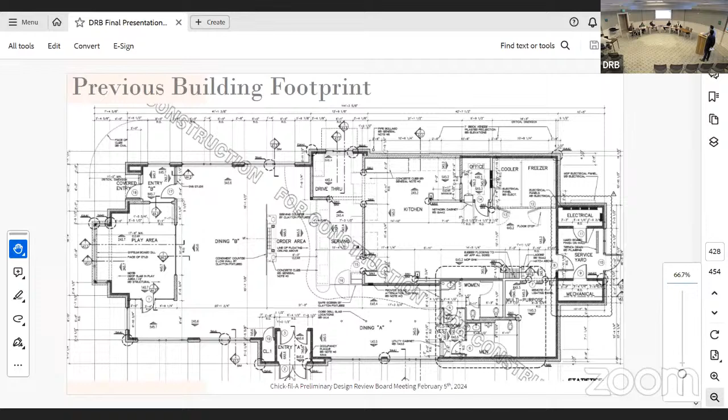So what we're doing with this building is we're increasing not only the size of the addition, we're also increasing the size of the interior of the drive-through just to add some more space for the employees, provide a better environment for them to move along cars quicker. Over here in the building addition, we were able to add an employee room there. It does have a window, just a service area, and then of course our walk-ins up top there.

Like Kevin had mentioned before, with the OMD canopy on the side there, the idea is to reuse most of the canopy column locations and then just expand outward. This canopy would look very similar to the one they have on site right now, black, the one over the window there, not the one currently over the order areas. We're all going forward with this new black channel canopy.

So if you want to go into the next slide. So of course, up top on the left, there's our existing conditions, and then down here in the bottom we have our new one. So you can see the new dual lane canopy. As far as building improvements go, we are going to be replacing the existing awning over the main entry there off to the right. You can go to the next slide.

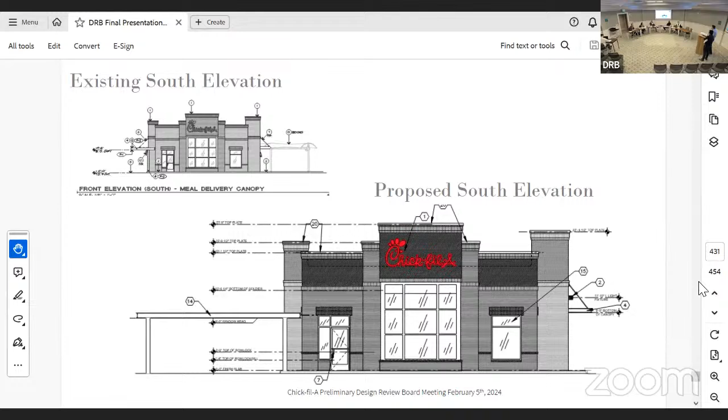These are just colored elevations of the building there. You can go to the next slide. So this is the drive-through side elevation.

So like we said before, we are expanding that canopy there. It's going to look relatively the same, just shorter, and it'll be dual lane. We are switching out a bay of windows there, adding the new man door into the drive-through cockpit. The windows around them will have a spandrel film on them, just so you don't see the wall behind the windows there.

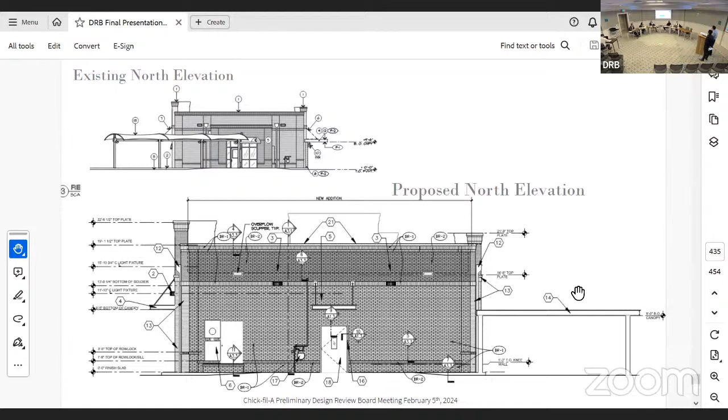You can go to the next slide. Of course, this is color renderings, and then the back elevation. So this is where you saw the most change. We knocked down that existing building addition, built up the new addition to match the existing building height. All the brick on the building is gonna match the existing building, same with fixtures and whatnot. We are hanging a canopy over that back door there to match the entry canopy above the main entry.

And then this is our entry elevation where you can see that new main canopy over the main door and the new windows in the employee room over there. So you can go to the next slide.

And continue. So this is the existing face-to-face canopy, the one we are knocking down. You can see there it is fabric. Go to the next slide please. And there would be the triple lane face-to-face to match the OMD. The colors of it are going to be matching the canopies that are in the building there.

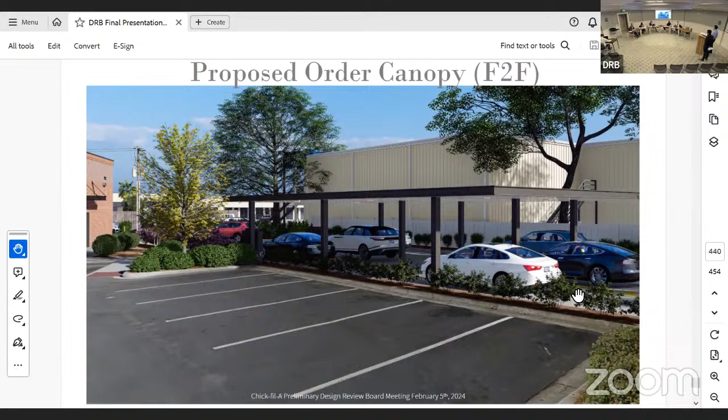I think we're good. So there's just your canopy layout plan for what it looks like underneath the triple lane canopy there. We are gonna have 2 to 3 menu boards, still trying to work that out with Chick-fil-A there.

So the idea for the canopy is also that it works as a shelter for the staff member from the cold. They have fans and heaters on there. All the canopy has internal drainage, so we would be connecting to underground storm if we can, same for both the OMD and the face-to-face. Go to the next slide.

That's a proposed rendering of the new side there with the new OMD canopy. And that's just a layout for your OMD canopy showing we do have crosswalks in there for the employees for safety, and a 3-foot walkway in between the 2 cars there for safety.

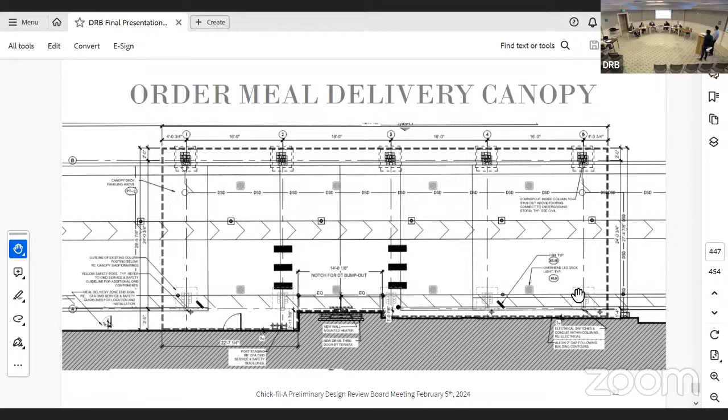I guess that's all we have to present. Do you guys have any questions for us? Thank you.

Any more questions? I was gonna ask you what OMD stood for, but I saw it. What was it? Quick serve or QSR. We learned that last year. Learn something new every day. Quick service restaurant—Chick-fil-A loves to create acronyms like OMDs. Actually, we're gonna learn something here.

It's a first for me. I had a question. I assume that the landscape buffer and everything is good to go. One of my questions was about the landscape buffer, the white fence on the north, this one here. When I look at the plans, it looks like the widening of these lanes is gonna be right up against the fence, and you aren't showing this existing landscaping. Not that it looks that good anyway. But I was just curious, is all this landscaping going away with the widening of these lanes?

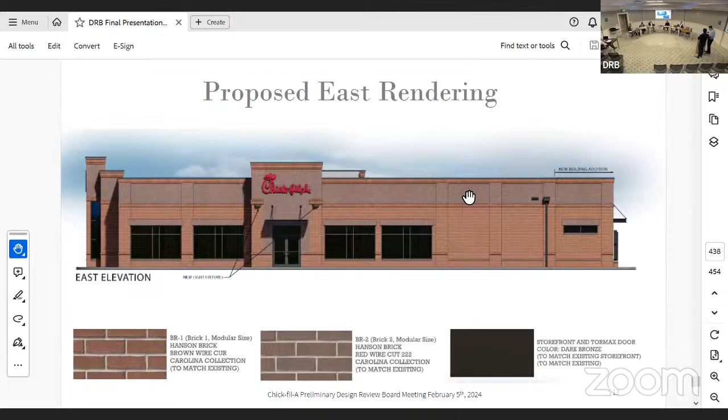Let me go back to the site plan. Yeah, we do have a new landscape plan, at the end of the presentation. Well, I was just looking at this here. Okay, you can—this is at the beginning. Well, I guess you do show a label that says landscape buffer.

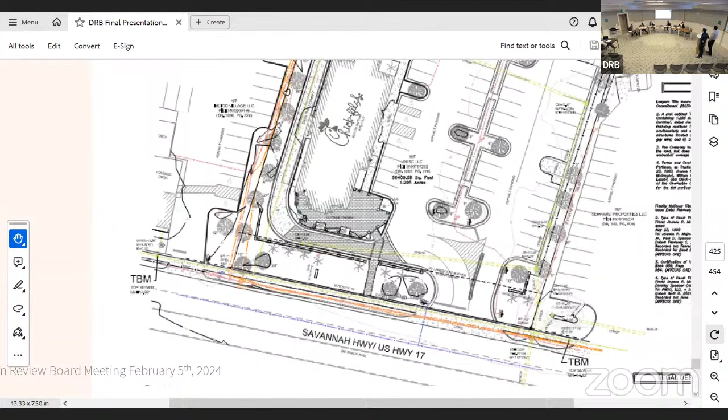Do you have the planting plan? Only 5 feet. Sorry, my tablet—it just looks super tight on the photograph. 5 feet is tight. Right, but that's allowed by the city though, right? Well, again, that's gonna kind of be TRC. It backs up to another metal building, so it's not— but is there proposed landscaping in there? Yeah, that's what I was trying to see.

You can pull that up, the last sheet of ours. My tablet—it's the very last sheet. Oh yeah, there it is, there it is. So it doesn't go the... yeah.

That's what I was looking at, the fence was too close to the curb to have any landscaping, and the landscaping doesn't go the full length, it's just at that left corner. That white vinyl fence is going to stay, right?

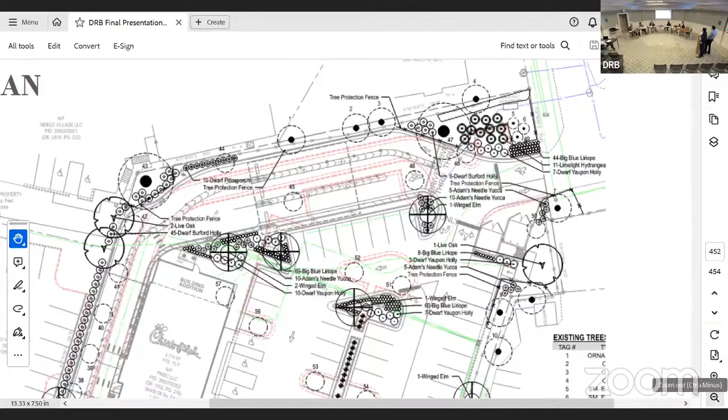We'll have to talk to see if that fence is on our property, because Chick-fil-A does not like fences like that. I'm not sure if that's theirs or the neighbor's. The survey says it's yours, and it looks like the fence is jogging around. We'll look into that. I'd rather see landscaping there than that fence.

Vinyl fence against a metal building. Lucas loves the fence. Beautiful, that's the best part of the design. Yeah, that captures it. Okay, that's all I had.

Is there anyone from the public here to speak on this project? No.

Staff recommendations: staff is supportive of the small yard addition and renovation to the existing Chick-fil-A. The building addition matches the existing building. The additional order and pickup lanes will help stacking lines. Staff had previous input on the relocated trash enclosure, so we're fine with that location. Staff comment one: all bollards are to be painted dark bronze to match the canopies with a reflective band at the top. Staff comment two: when supplying existing versus proposed comparisons for the site and building, it's helpful if they're at the same scale and angle. Number three: show the existing landscape along the north lot line.